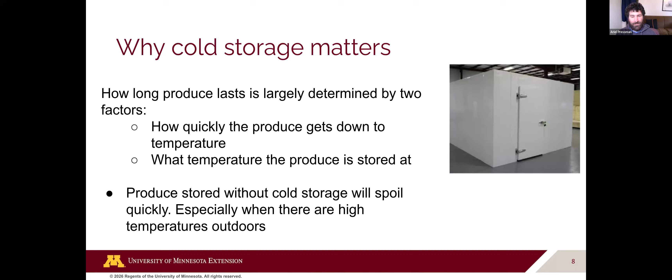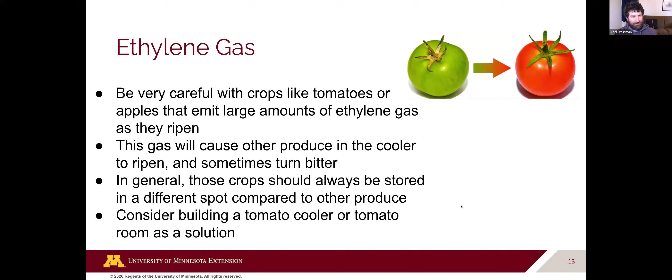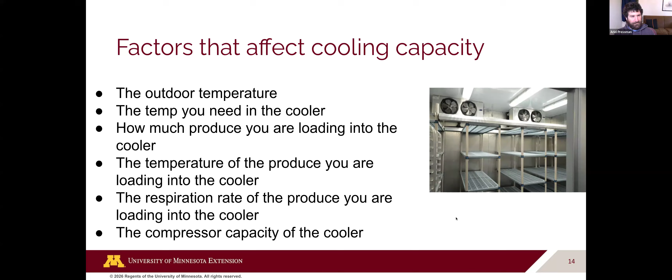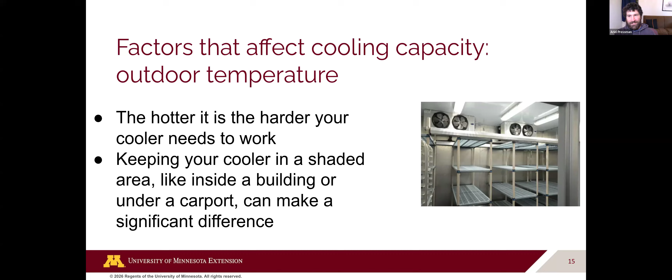Okay, so to start, outdoor temperature. This is probably obvious, but just to state the obvious, the hotter it is outside, the harder your cooler needs to work, right? Keeping your cooler in a shaded area, like inside of a building, a carport, even under a tent, can make a really big difference. You can actually have a lot of heat transfer from, if you have a walk-in cooler, the outside of the panels are normally metal. If that's heating up, it's cooking, right? And then there's heat that can get transferred into your cooler. So it can make a big difference just keeping it in any kind of indoor or cooler space to start.

A really big mistake I see people making is they are planning for a cooler that's going to work with the average high temperature in their area, not the peak high temperature. So we might look up and go, okay, in Minnesota over the course of the summer, on average, the high is 80 degrees. And so we build a cooler that works when it's 80 degrees outside. But the reality is, we know pretty much every August, we're going to end up with a string of days that's in the 90s. Well, we don't want a cooler that's going to fail to work at the hottest part of the season.

So plan for a cooler. Like there's some online calculators where you can kind of do the math and go, okay, well, will this size cooler work with this outdoor temperature and this indoor temperature? If you're doing the math, if you're trying to think it through, plan for what you need during the peak of the heat, not just the average heat during the day.

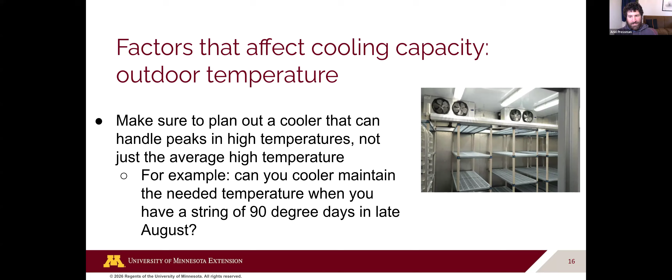Okay, so we're talking about outdoor temperature. Now the next factor is the indoor temperature. So what temperature are we actually setting our cooler at? And the more important piece isn't necessarily the temperature we're setting the cooler at. It's the difference between the outdoor temperature and the indoor temperature. So if it's going to be 80 degrees outside and we need it to be 40 degrees inside, it's that 40-degree temperature range that makes the much bigger difference.

For those of you with greenhouses, this probably sounds familiar. It's the inverse problem of the spring, right? When we have greenhouses, we're going, it's 20 degrees outside, but I need it to be 60 degrees inside.

Now we're doing the opposite and going, it's 80 degrees outside, I need it to be 40 degrees inside. Just keep in mind, the lower the temperature gets, the more energy it's going to take. And in general, it takes extra energy the even colder you get. So it takes more energy to get from 40 degrees to 39 degrees than it took to get from 41 degrees to 40 degrees. So just keep in mind, the colder it's getting, the more energy it's going to take.

So if you can run your cooler at a slightly warmer temperature, that is going to be more energy efficient. It's going to need a smaller compressor. You can work with more produce. Undersized compressors are really going to struggle to keep up with lower cooler temperatures. This is especially important if you're working with a CoolBot.

And I'll talk a lot about CoolBots later, but because with a CoolBot you're using an air conditioner, you pretty much by definition always have an undersized compressor. I mean, again, keep in mind what you're trying to do. You're taking a household air conditioner that's meant to keep your house at most at 65, 68 degrees, and you're asking it to bring a space all the way down to 35, 36 degrees. So keep in mind those do tend to be undersized almost by definition.

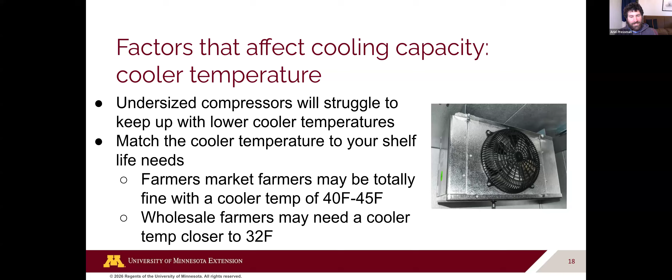If you're doing wholesale, where, for example, you need your produce to last for 2 weeks, like Annalisa was talking about, you're going to need to keep your cooler temperature much, much lower. So just keep in mind, you should be matching your cooler to your actual needs, not to some imagined needs. So that's about the farmer's market. That's about how long you need it to last, all of that type of stuff.

Okay, so one important concept is there's a difference between the temperature in your cooler and the core temperature of your produce. So when I say the temperature of your cooler, I mean if you hung up a thermometer, what temperature would it say? Right? So if the air temperature is 36 degrees, for example. The core temperature of your produce is if you stuck a thermometer, like a meat thermometer, inside of a bell pepper, what would it read?

So the outside of the vegetable might be cold to touch pretty quickly, but because it's dense, like there's a lot of material there, the inside of the vegetable is not going to cool down as quickly. So think about it the same way as if you're cooking a steak, for example. The outside of the steak is going to cook really quick, but if you stick a meat thermometer in it, it takes a lot longer for the inside to cook. So it's the inverse principle here. The outside might get cold to the touch very quickly. That doesn't mean that the inside is actually cool.

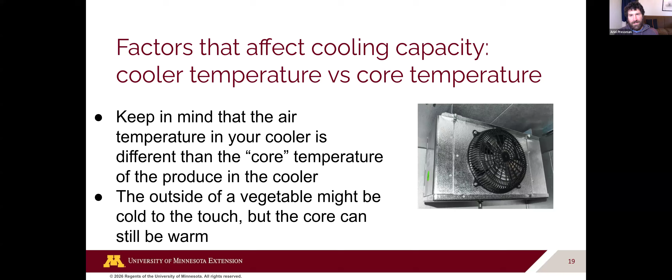Denser produce is going to take a lot longer for the core temperature to come down. So if you're doing like kale, the reality is the surface and the core are basically the same because a kale leaf is super thin. But if you're doing something dense, like let's say a sweet potato or a bell pepper, there's a lot of flesh there. So that means the outside and the inside might have very different temperatures.

And at the end of the day, what's going to determine how long your produce lasts is the core temperature, not the air temperature. If I have something that has a core temperature of 80 degrees, like a zucchini, and it's in a cooler that's 34 degrees, it doesn't matter that the cooler is at 34 degrees. What matters is that the zucchini itself is at 80 degrees. And again, if you want to figure out what the core temperature is, I would literally just buy a meat thermometer. You can just stick it in there, and you can see what the temperature is on the inside compared to the outside.

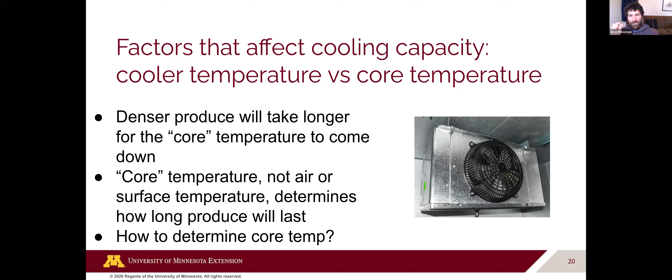Okay, another factor that's going to affect cooling capacity is produce load. And what I mean by this is how much produce are we loading into the cooler at one time? So if we're only loading in, let's say, 10 pounds of warm produce into a cooler at once, it's going to be relatively easy to cool that down. If we are loading 2,000 pounds of warm produce into a cooler at once, that's going to be much, much

harder to cool down. It's a very similar concept to why you've probably always heard you don't want to put a pot of warm soup in your refrigerator, and the reason is the refrigerator can't keep up with cooling the soup. The soup is literally going to let off more heat than the cooler can cool off. And that means the net effect is you're actually going to end up warming up your cooler and potentially spoiling other stuff. So you have to be very careful about the produce load relative to the size of your compressor and make sure it can handle that.

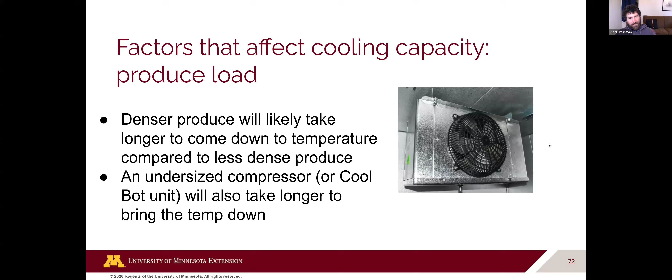Sometimes that means you want to bring in produce slowly over the course of time. Sometimes that means you want to pre-cool the produce so it's not as rough on the compressor, and we're going to talk about that in a minute. In general, denser produce is going to take longer to come down to temperature compared to less dense produce, so it's going to put more strain on your compressor.

So like on my farm, we grew a lot of zucchini. Bringing in 2,000 pounds of hot zucchini, that is a lot of plant material that's really hot, and it's going to take a long time to cool down. That's very different than bringing in 2,000 pounds of kale. And again, keep in mind, those undersized compressors are going to take a long time to bring that temperature down.

And again, I'm not knocking CoolBots. I love CoolBots, but again, keep in mind, CoolBots are by definition undersized compressors. They're not going to do a good job with large amounts of hot produce coming into your cooler all at the same time.

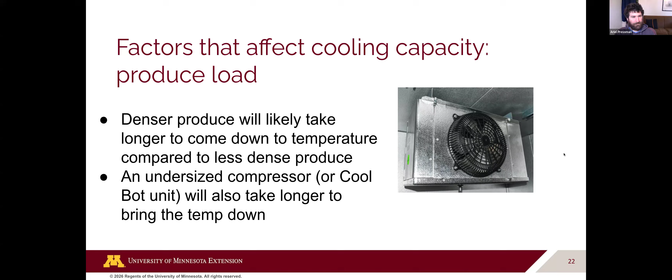Okay, so the next factor that's affecting the cooling capacity is the temperature of the incoming produce. So it's very different if we are putting 2,000 pounds of zucchini into the cooler that's already 40 degrees versus if we're bringing in 2,000 pounds of zucchini that are at 80 degrees. Generally, the colder the produce going into your cooler, the less work the cooler has to do, right?

Because if the zucchini is going in at, say, 40 and the cooler's at 38, the cooler only has to bring the zucchini down by 2 degrees. If the zucchini is going in at 80 degrees and the cooler's at 38, now I'm expecting the cooler to bring down the temperature by 42 degrees. That's a lot of work.

I would definitely keep in mind there's a couple ways to kind of mitigate this on your farm. Probably the easiest one is just harvesting early in the morning before the produce has accumulated heat. So literally when the temperature itself is cooler. That's especially true with produce like zucchini that maybe you don't want to be washing anyways. I would harvest that first thing in the morning.

Keep in mind that if you harvest produce in the evening, it might seem like it's cooler. It's cooler to the touch, the air is cooler, but it's actually been accumulating heat all day. So harvesting in the evening is not going to help out your cooler very much. Harvesting in the morning is going to help out quite a bit more.

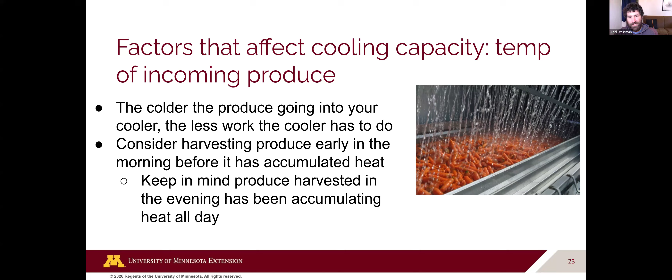The most effective way to bring the temperature down is hydrocooling. And so what we mean by that is washing it with water. So sometimes that'll mean dunking it in water. Sometimes it might mean spraying it with water. But in general, we're using water not just to clean the produce, but to actually bring the temperature down. So no different than on a hot day why you want to get sprayed off with a hose or go to a water park or something like that.

Keep in mind, we don't want to hydrocool all types of produce. So things like tomatoes, we generally don't want to wash for both food safety and spoilage reasons. But most types of produce are totally fine to hydrocool.

And the reason the hydrocooling helps is it's a couple different factors. One is that the water itself is colder than the produce going into it. So if we harvested those carrots at 70 degrees, but then we dunk them all in water that is 35 degrees, that's really going to help take the heat out and bring it down.

We also get an evaporative effect of having some water on the produce when it goes into the cooler. So there's literally more water that's evaporating, that's making it colder. There's also more surface area to cool down as opposed to just the carrot. So there's a lot of benefits to doing the hydrocooling.

I would highly, highly recommend hydrocooling, especially leafy greens that spoil quickly. We've talked to a number of buyers who have told us that they can really see the difference in the hydrocooled greens versus the not hydrocooled greens. And the reason is probably the hydrocooled greens are getting down to temperature much, much quicker than if they're just sitting in the ambient cold air of the walk-in cooler.

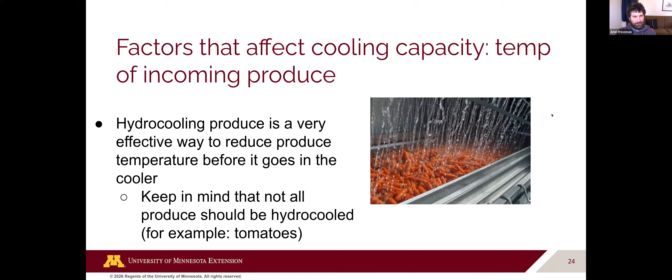Okay, respiration is one that, I'm going to be honest, until about a week ago, I never spent much time thinking about with a walk-in cooler. But after doing some research, I am definitely convinced this is something you need to think about. So different types of produce have different respiration rates. And a respiration rate is the speed at which a vegetable consumes oxygen and releases carbon dioxide. And that determines the rate of decay.

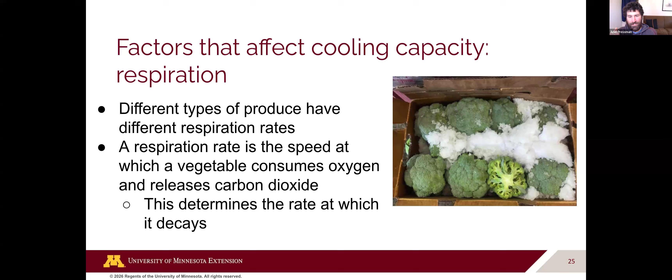So maybe another way to think about this that's a lot simpler is just how quickly is this produce spoiling? Some produce is going to go through the respiration process quicker and spoil quicker. Other produce is going to go through the respiration process slower. So different types of produce have different respiration rates. And one of the effects of a high respiration rate is the produce is literally creating heat as it's decomposing. So it's harder to cool down.

But keep in mind, again, this is going to affect your cooling capacity. If you load a cooler with 2,000 pounds of broccoli, it is going to be much harder to cool down that broccoli compared to 2,000 pounds of onions. So that's not to say you can't or shouldn't do it, but this is something that's really worth taking into effect because it's actually a major factor in how your cooler operates and how much it can cool things down.

For what it's worth, there's a reason when you look at that high respiration rate vegetable list that those are all vegetables that we tend to hydrocool. That's going to bring the temperature down much quicker, and it's going to reduce kind of the pull on the compressor when we put it inside the cooler.

Okay, the next piece is the actual compressor. So just to level set, the compressor is the thing that actually is cooling down the air in our walk-in cooler. So you've probably seen BTU. If you're buying an air conditioner for a CoolBot, it'll say this air conditioner is 5,000 BTU or 25,000 BTU. In this context, that's essentially a measure of the cooling capacity of your cooler. So a higher amount of BTU means it can cool more. A lower amount of BTU means it can cool less.

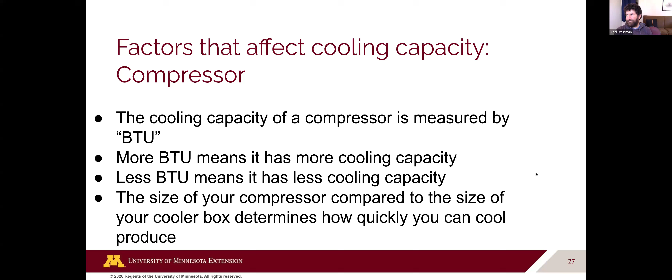Another thing you want to consider, no matter what type of cooler you have, is how you can get the produce to cool quicker inside of the cooler. So one of the things we found on my farm is how you stack the boxes in the cooler has a really big effect on how fast they cool. So if you're stacking all your boxes on a pallet, so they're all kind of bunched together and touching each other, think about what's happening with the cold air.

If you have a box that's not on the top layer or the outside layer, if you have a box that's on the inside, that box is never getting touched by cold air. So you're essentially insulating that box. It can't get cooled down. So what we like to do is when we first put produce in our cooler, we'd offset the boxes. So maybe we get a pallet and we make sure every single box in the first layer, I could put my hand around it. So it had cold air that could fall.

And then the next layer we'd offset from that. So every single box had a lot of surface area around it where cold air could fall. I'd usually do that for about a day, and then I'd condense the boxes after they were cooled down. So keep in mind, you want to think about the airflow around the boxes so you can get cold air all around them so they can cool down quicker.

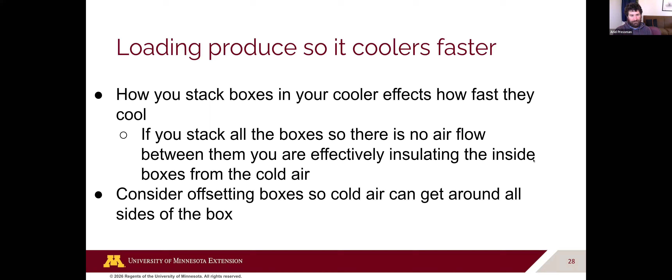Another mistake I often see people make is just think about the process of how a cooler is cooling things. So we've got the compressor that's cooling the air, and then we've got a fan that's pushing the air out. So if we have a CoolBot, those two things are both happening inside of the air conditioner, right? It's cooling down the air and then the fan is blowing it out. Traditional walk-in cooler, we've got the compressor and then the fans. But keep in mind that if the cold air can't touch something, it can't cool it down.

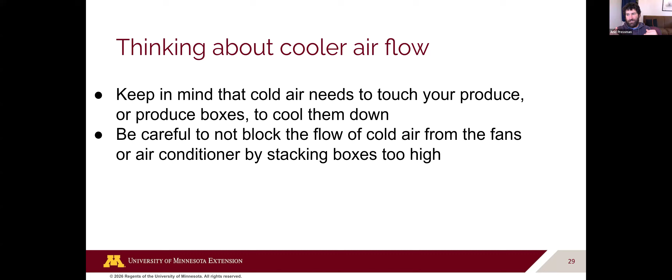So especially in smaller coolers, sometimes what I see is people stack all their boxes up and they're stacking their boxes so high that all the fan air is just hitting the box. And that means that air is not getting to the other parts of the cooler. So be careful not to block the flow of cold air from the fans or the air conditioner by stacking boxes too high. It's generally a good idea. I like to stack my pallets maybe 5 or 6 boxes high at most. And that way there's plenty of room for the air to circulate and go throughout the entire cooler.

Another really important concept is even smaller coolers tend to have hotter and colder zones. If you have a larger cooler, this is going to be really true. So when I eventually grew my farm, we had a really big cooler. It was, I think, 16 feet wide by 40 feet long, something like that. So there were a lot of zones in there. Even if you have an 8 by 8 cooler, you're going to find there are parts of the cooler that are colder and parts that are warmer. You can easily measure the air temperatures if you're curious by just going in and hanging some thermometers and seeing what the different temps are.

But in my cooler, what we generally found was the air directly under the fans was the warmest. And the reason is because if you've got your fan here, the fans are pushing cold air out, right? So under them is kind of the last part that the cold air will get to, because the cold air has to hit the opposite wall, then it's coming all the way back under that fan. So that's where we keep our warmest produce, like the zucchini and cucumbers that like to be at 45 or 50 degrees.

What we found is the coldest air was directly opposite from the fan. So because that cold air is just shooting right out to the opposite wall, that wall is where we keep things like the leafy greens that like to be as close to 32 degrees as possible. Based on the shape of your cooler and how you have the fan set up, you may have some different situations, but I'd really encourage you to think that through, because it actually made a really big difference for us in terms of how long different types of produce would last.

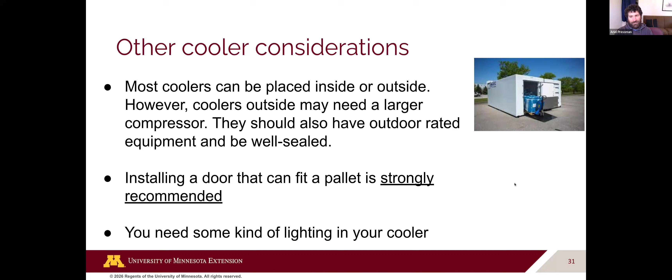Okay, so keep in mind when you are thinking through your cooler, if you're installing a new cooler, you've got to think through the electrical considerations of the cooler. So first of all, remember that many coolers, including CoolBots, often require 220 volt power. So that means it's a special outlet. It's not the standard wall outlet that you have. And unless you're very handy, that's going to require an electrician to install that.

Also keep in mind that you don't just necessarily need the electrician. If you're installing a traditional walk-in cooler, you're also going to need an HVAC professional. It is generally not safe for farmers to be installing HVAC type equipment. There's just a lot of safety concerns around the gases, the chemicals, some electrical stuff. If you're installing a CoolBot, you can do it yourself, which is great. But if you're going to do more of a traditional walk-in cooler, plan for the expense of having to hire often kind of expensive professionals to do some of the work for you.

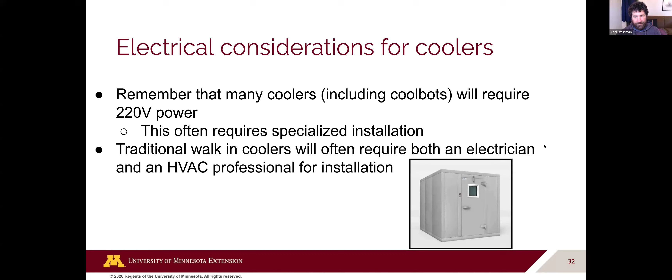Okay, the other thing to consider before you even think about, do I want a CoolBot? Do I want a traditional cooler? Is what size of a cooler do you need? This is something where, to be transparent, I often see farmers making misassumptions about needing a larger cooler than they actually need. So I kind of did the math for you on roughly how many bushel and a ninth boxes you can fit in different size coolers.

The reason I'd really encourage you to think this through is this has a lot of implications for the cost of the cooler. It also has a lot of implications for what type of equipment you need. So if you can settle for an 8 by 8 cooler, for example, you probably need an air conditioner that can actually work off 110 volt instead of 220 volt electricity. And that means you're going to save a lot of money not needing to hire an electrician.

The last thing is, remember, you should determine your size based on the maximum number of boxes you need, not the average number of boxes, right? You need a cooler that's going to work at the height of the summer for you, not just a cooler that can hold the number of boxes you need in June or October.

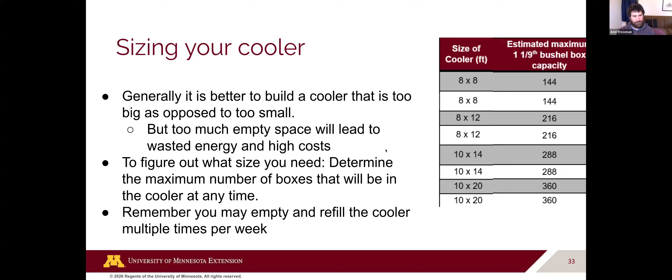Okay, so let's talk about the first part of a cooler, which is the cooler box. I will give the caveat, I'm going to talk about cooler boxes when you're buying panels. You can find plenty of plans online if you want to build your own cooler panels. Generally, that looks like people building out a frame and then using spray foam or hiring somebody with spray foam. You can also build your own panels with rigid insulation and some wood.

I personally feel like if you're really handy, go for it. Otherwise, walk-in cooler boxes that are used or panels are kind of a dime a dozen. I don't think it's worth the extra effort to make your own thing for the most part. So keep in mind, this is what a cooler is going to consist of: metal flashing on either side. It's going to have insulation inside, and then it's going to have a hook and nub system, which I'll show you a picture of in a second, which is how they attach.

If you haven't built a walk-in cooler before, it might be news to you that walk-in coolers do not require any power tools or any kind of permanent construction. Generally, there's no screws, there's no nails. You can take them apart and put them together with an Allen wrench. And that means that, to my mind, these are really appropriate to build on the farm, even if you're not very good at construction. I am by no means a skilled carpenter. I'm, in fact, a pretty bad carpenter. But I've probably built at least a dozen of these over the years because, again, they're pretty simple. It's almost like just large Legos putting them all together.

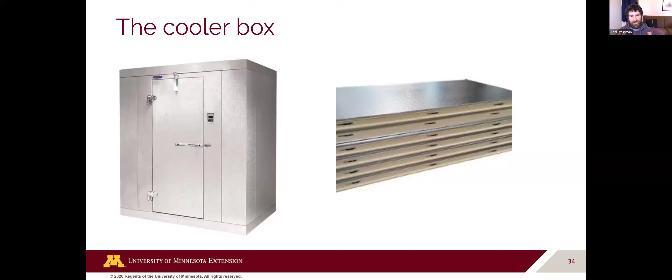So again, these are much simpler to put together than it seems like they should be. So I'd really encourage you, don't be intimidated. If you can do what's necessary for the day-to-day of your farm, you can absolutely put together a walk-in cooler. And if you have trouble with it, I can help you with it. That's a lot of the work me and Annalisa do.

You can buy these at a hardware store. Literally, you can buy a kit of them for $20. They're useful for a lot of things on the farm, so I'd highly recommend considering getting those for your farm anyways, and then using them on the panels.

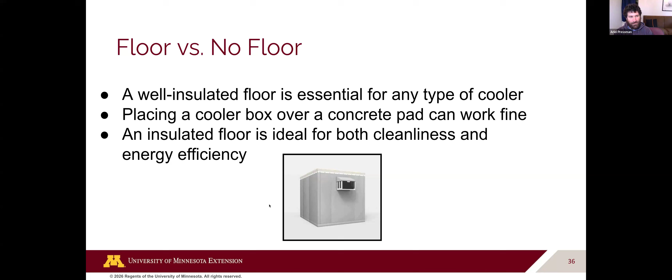Okay, so if you're putting down a new concrete floor, maybe I'll talk for a second about why we need the floor. So keep in mind that what we're doing in a cooler is we're cooling the air. And warm air rises, cold air sinks. So that means if we don't have an insulated floor, if say we put our box over the ground, beyond the food safety concerns, we're losing all that cold air through the ground. We're not keeping it in our cooler. So that's why we really need an insulated floor to make sure that the whole space works.

I think I was reading somewhere that the floor can have as much as a 30% effect on how well insulated and how well you can cool down your box. If you're putting down a new concrete pad for your walk-in cooler, you might want to consider installing insulation under the concrete. It's literally just the rigid foam and then the concrete goes on top.

You could build a floor out of excess cooler panels. That's what I did with my cooler. We just had more panels than I needed, so we chopped them up and used that for the floor. You could build a floor using rigid foam insulation and a material like HDPE, which is basically just hard plastic. There's a lot of ways to do the floor, but I really recommend no matter what you do, think about a floor.

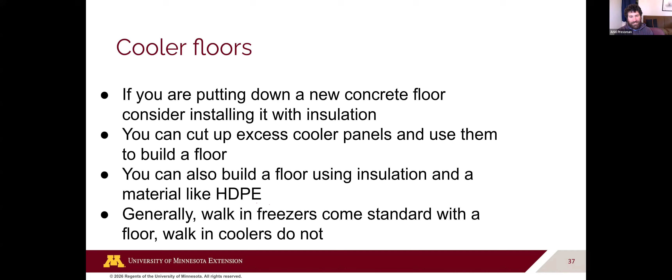If you're buying a used cooler box, just know that in general, walk-in freezers come with floor standard. Walk-in coolers do not. So it's pretty normal to get a walk-in cooler that doesn't have a floor as part of it. So just make a plan like that one with the rigid foam and HDPE or extra cooler panels. If that's your situation, I'm happy to talk it through with you. If you're buying a brand new cooler from a place like CoolBot, they do offer some options where they also come with floors. I think it's always worth investing the extra money to get the floor.

Okay, so we kind of talked about the box. We talked about the floor. The next big thing is now how are we actually cooling the air in the cooler? So first, it helps to understand what a CoolBot is, and then we can talk about what a more traditional compressor is. So CoolBots allow you to use an air conditioner instead of a traditional walk-in cooler compressor.

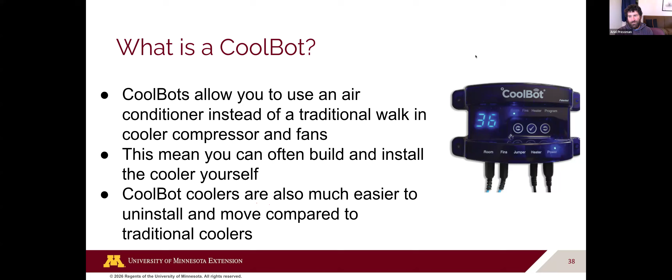So the way this controller unit works is it overrides the temperature sensor on an air conditioner and it tricks it into staying on for a longer period of time. So basically you end up buying an air conditioner that was meant to cool down a 600 square foot house. You put it in a 64 square foot cooler box, and then the CoolBot tricks the air conditioner into saying, hey, I think it's too warm in here. I should stay on. I should keep getting down to a lower temperature.

CoolBots generally work best for smaller coolers that don't have heavy produce loads. They're not going to work well in a poorly insulated cooler or a cooler that's open frequently. So again, going back to that point, these are, by definition, undersized compressors. So I would not recommend using this in a situation with poor insulation, with a lot of produce, something that's going to put a lot of pressure on the compressor.

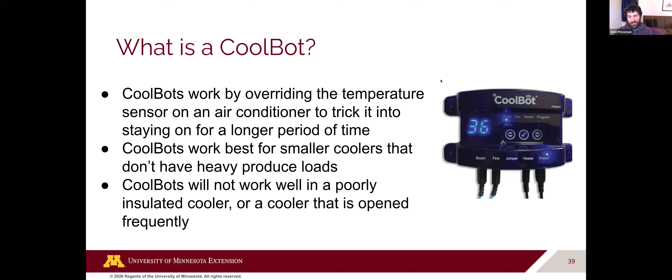So in general, go with a traditional walk-in cooler if you need a larger cooler, especially anything larger than a 10 by 20. If you've got a large amount of produce going in at the same time, also if you're doing wholesale, your produce is not going to last as long in a CoolBot cooler. So it might be totally fine for smaller wholesale accounts, for farmers markets, for things like that.

But if you're planning to sell to like a large distributor where they need the produce to last 2 weeks, this isn't going to work well for you. Traditional walk-in coolers will be more expensive up front and have higher installation costs, but they are going to work a lot better for those kind of larger wholesale type accounts.

Okay, so what does it cost if we're talking about CoolBot coolers? I'm not going to talk about the cost for more traditional walk-in coolers because so much of that cost is wrapped up in the installation of them. So you're really going to have to talk with whoever the local installation professionals are to get a good feel for what it's going to cost.

I will say that for traditional walk-in coolers, plan for probably the box, the compressor, and the fans to only account for maybe half to two-thirds of the cost. The professionals really are going to charge quite a bit to get everything else set up. But maybe you're lucky, maybe you have someone in your area that's a little more reasonable or is used to working with smaller farms.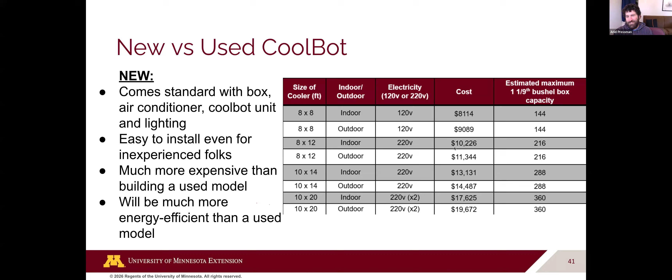Also, just real quick, I want to point out before I move on, take note here, the 8 by 8 cooler is the only one that uses 120 volt electricity, right? Any of the bigger coolers, you need that 220 volt outlet. So even though you're shelling out for everything brand new, you would still need to hire an electrician to install that outlet on your farm if you wanted a larger cooler.

Okay, so I think the easiest way to save money is buy a new air conditioner, buy a new CoolBot, because those are going to be relatively small amounts of money in the grand scheme of things. So like a new CoolBot unit is about $350. Even the biggest air conditioner you can find will be $700 or $800. But then buy a used walk-in cooler box.

And the reason is you tend to see a lot of these cooler boxes going for very, very cheap. And the reason is because they're kind of just unsightly and annoying as a new person takes over a property. So if a restaurant goes out of business and now it's turning into a retail location, they don't want that cooler. And in fact, sometimes they're willing to pay somebody to get rid of it.

So this exact listing: you can buy the CoolBot unit for $350 and the air conditioner for $800. So that means if we're willing to source this box used and do some of that work, out the door now, we have an 8 by 8 cooler for $2,150. If we bought that brand new from CoolBot, we'd be spending $8,000 to $9,000. So again, there's a huge cost difference there. For many of us, that's the difference between whether we can afford to do the cooler or we can't. That's a saving of $6,000.

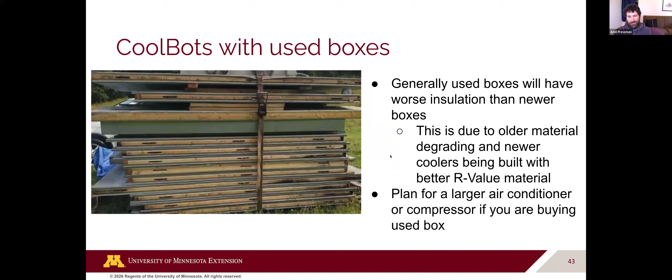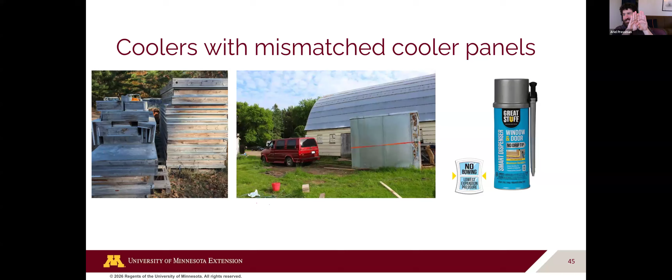If you use spray foam, I would strongly recommend using the blue bottle that's for windows and doors. And the reason is because with windows and doors, you don't want it to expand, right? Because you don't want it to bow out your window or your window frame. Same thing with the cooler panel. You're kind of using it to glue them together. You don't want something that's going to expand because that'll push the panels apart.

If you buy these kind of junk piles of panels, keep in mind to make sure it comes with a door and a frame. Cooler doors are really expensive. That's not something you want to have to buy after the fact. They're sometimes $500 to $1,000. So whatever you buy, you want to make sure it already has a door and a proper frame for it.

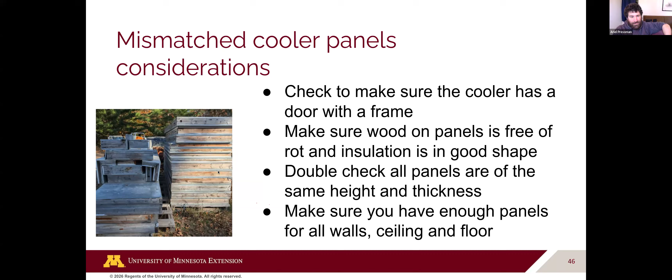If it has wood, like these ones do, make sure the wood is free of rot and the insulation's in good shape. Double check all the panels and make sure that they will roughly match up with each other. So what's not uncommon is you might have freezer panels, which are 4 inches thick, and cooler panels, which are 3 inches thick. They're not going to match up together really well. And just take a count, draw a picture, and make sure you have all the panels you need in terms of wall, ceiling, and floor to build whatever structure you want to have for your farm.

Okay, anybody who's been to my presentations knows I am a big fan of people finding stuff cheap. I literally pulled these pictures this morning from Facebook Marketplace, so if you need a cooler, you can do your own search. Again, this stuff is always available. So the left-hand side, 1,500 bucks for that giant pile of panels. That was a listing where they said what I just said. They don't even really know where they came from. It got donated to like a thrift store. So you'd have to kind of do your own math to see if you have everything you need.

The one in the middle is a 5x6. It's a total complete box. It's got the floor. That's 2,700 bucks. The one on the right is much bigger and more expensive. It's, I think, a 10x12. All of these will be cheaper than buying a new box. So I'm not trying to disincentivize or tell you don't buy the new box. I'm just saying if money is tight, if money is the difference between you having a cooler or not, buy the used supplies. It's going to make a huge difference for you.

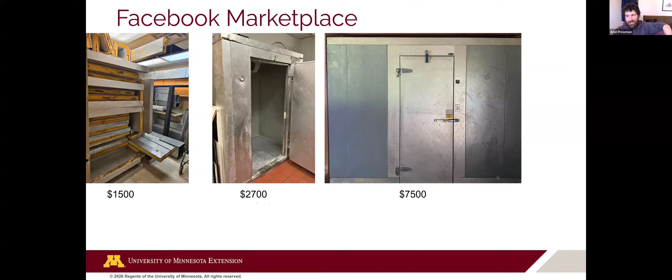No matter what you do, keep in mind you need the cooler to be super well insulated. So especially if you're buying a used box, the two biggest things you can do to make sure your cooler is well insulated is one, seal up any holes or cracks. So the easiest way to see if there's any kind of cracks or holes or place heat's getting through is after you've built your cooler, go inside and close the door. And anywhere you see light coming through is places where you're losing heat or you're losing cooler capacity.

The other thing I'd recommend doing is investing in vinyl strips to cover the doorway. So if you've ever worked in a restaurant, you know, it's pretty common. You open the door, it's got those vinyl strips going through. That'll stop you from losing a whole bunch of cold air every time you open and close the door. The vinyl strips will cost you 50 bucks. But it's just a no-brainer investment to kind of make it a more efficient space.

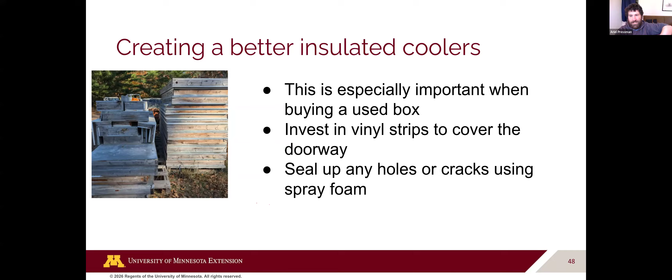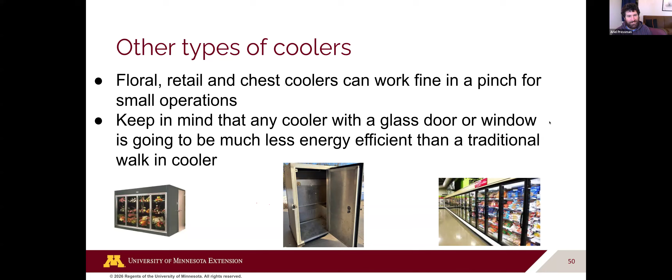So somebody said, what are your thoughts on building a box by framing up a shed and insulating it? Yeah, Marcos, I think that's totally fine. Especially if you have kind of a unique space that you need to fit it into, framing it up can work really well. If you're going to frame it up, I'd really encourage you to consider building out the frame and then hiring somebody with a spray foam rig. Spray foam tends to have a much, much better R value at the end of the day than the rigid foam panels.

So that can be a really nice way to do it and just have them get all the foam in there. If you're not handy like me, to be honest, I just prefer the panels because they're so easy. But yeah, I think framing it up totally makes sense. If you are going to do the shed, I just again encourage you, make sure the floor and the ceiling are also getting insulated. You need all sides to be insulated well to make the cooler work.